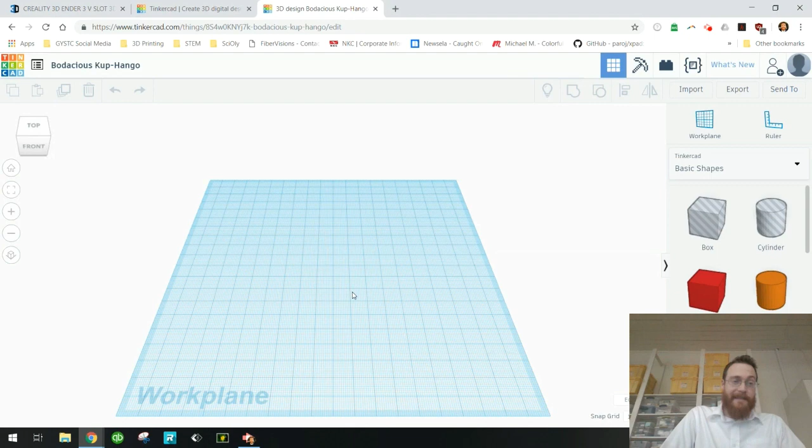Now, CAD, if you're not aware, stands for Computer Aided Design, and that's exactly what we're going to be doing in Tinkercad. Now, the first thing I like to do in any new design on Tinkercad is change this crazy name, Bodacious Kup-Hango. I'm just going to change it to Dodd First Object.

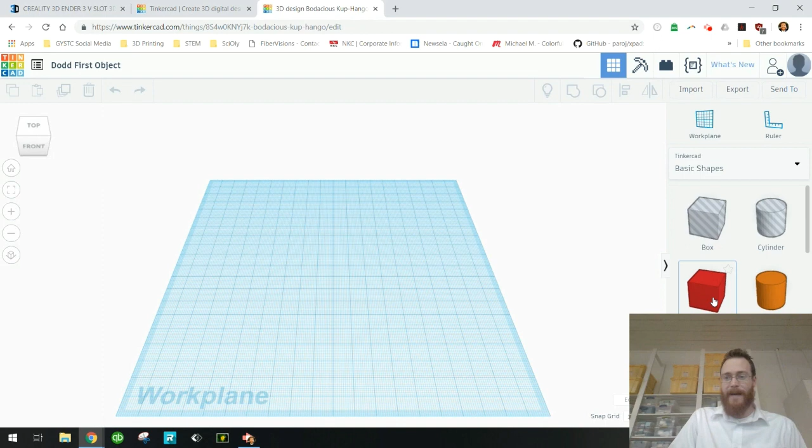All right, again, it's going to be a cube with my initials on it. So I'm going to just grab a box from my right panel here and click and drag it out onto my work plane. Now, I want to resize this box.

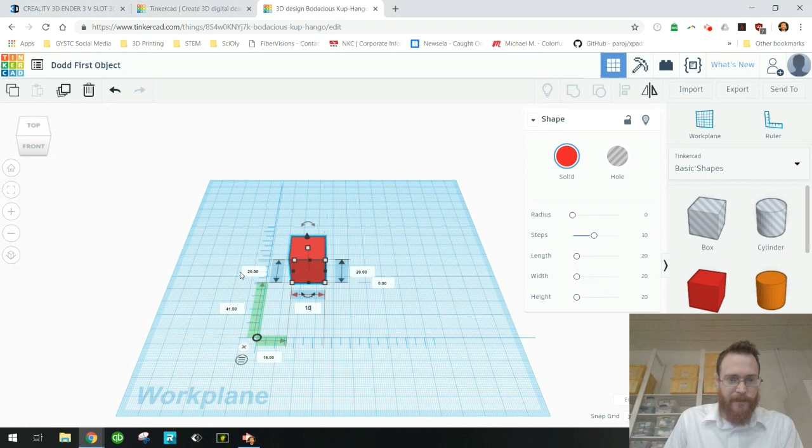My favorite way to resize the box is to click ruler, pull a ruler out, and simply change the size of my box from there. Now, I'm going to change the size of my box to 10 millimeters by 10 millimeters by 10 millimeters.

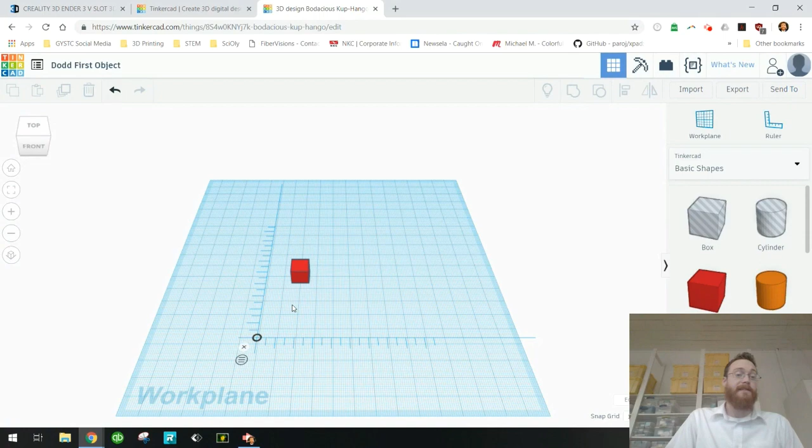So all I did to achieve that was click on the width of my box and type in 10. I clicked on the length of my box and typed in 10, and did the same exact thing for the height of my box. So I've got a really small cube at this point. And that's good because a really small cube is going to be really fast to print, and that's what we want.

So now what I'm going to do is scroll down on the right-hand side of my Tinkercad workspace. I'm not seeing text... there it is, I missed it. So I'm going to grab text and pull it out here onto my work plane.

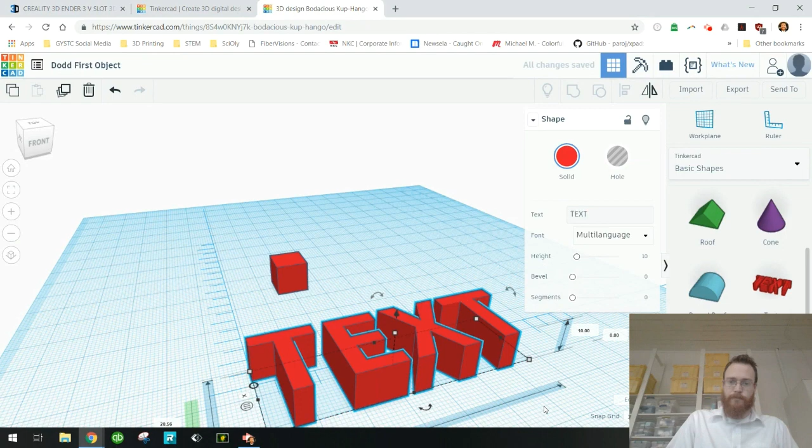And I'm going to make this text my initials. I'm just going to go with my first initial, which is W, because my name is Will. So I'm going to type in a W right here, and make it a capital W.

So what I want to do then is resize this W to be able to fit on my cube. And I know that my cube is only 10 millimeters by 10 millimeters, so I'm going to reduce my letter to under 10 millimeters.

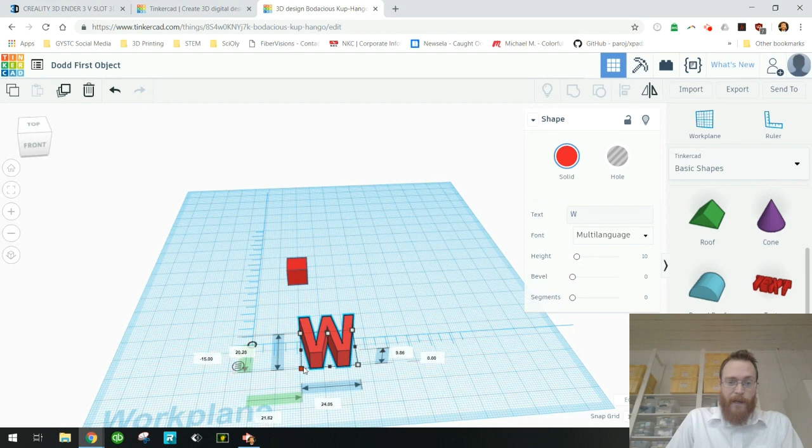The way I'm going to do that, so that I don't make my W short and fat or something like that, is I'm going to hold down the shift button on my keyboard. Then with my mouse, I'm going to left click one of these white squares, and what I can do is make my W smaller but keep it to scale so that it doesn't look funny, because you do run the risk of making it too tall or too short.

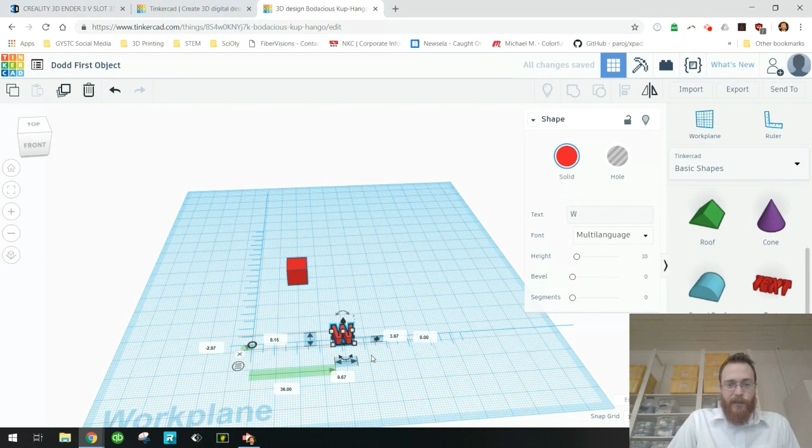But I am, let's see, 9.67 is the width of it. So yeah, we're good, we're underneath 10. So my W is now small enough to fit on my square.

Now, if you're unfamiliar with how I'm actually moving around on the screen here, you might notice that the camera is moving around quite a bit. I do have a video showing you some basic moves in Tinkercad. I would encourage you to review that if you have not, and again, I will link that in the show notes.

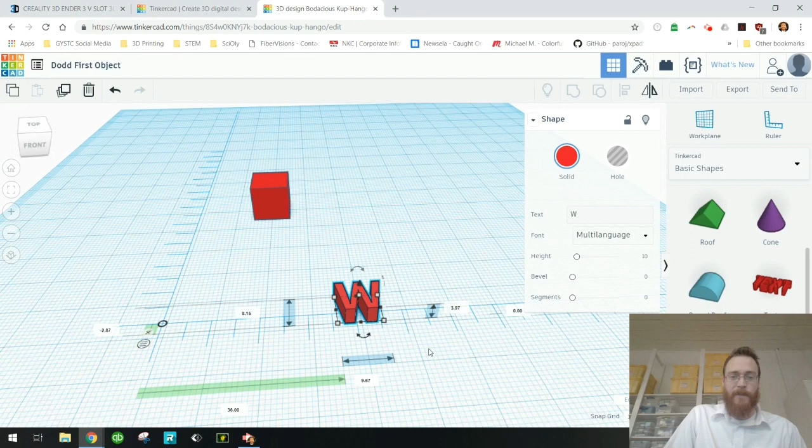The next thing I want to do is adjust my letter so that it's upright and I can just put it straight into my cube. So what I'm going to do is change my camera angle. Let me get rid of that menu. I'm going to click this curved arrow and pull my W up to 90 degrees.

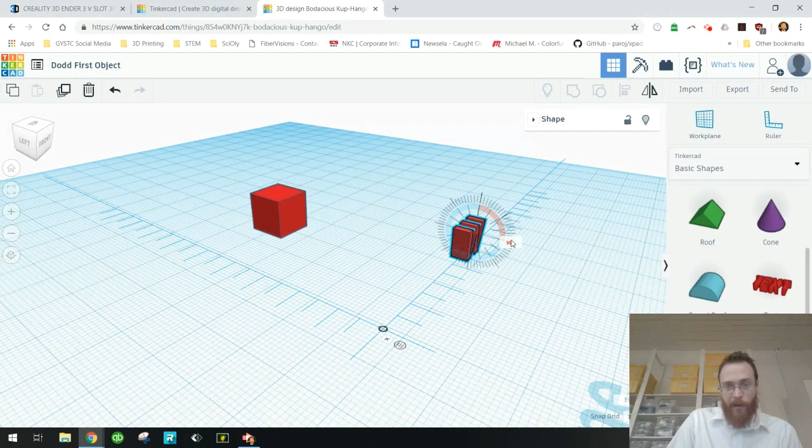There we go, we're at 90 right now. And that way I can just kind of slide that W right into my cube, and it would be no big deal. But before I do anything else, I do want to make sure that my W is aligned with my cube there.

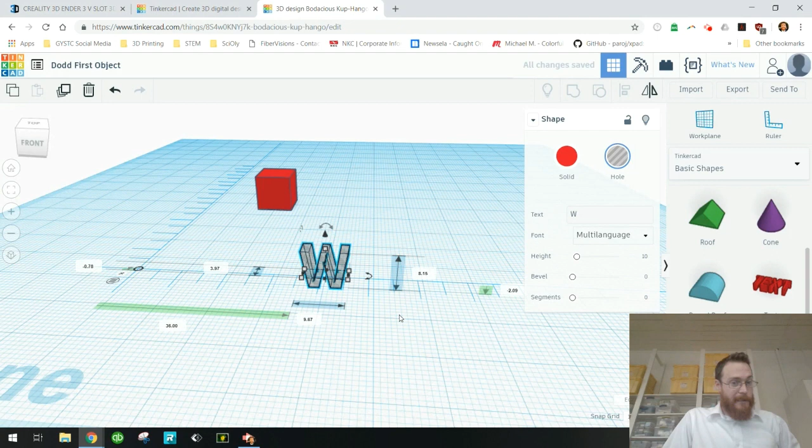But before I align it, I want to turn my W into a hole so it will actually cut a hole in my cube. I'm going back to this menu here, and you can see I've had my W selected. It's a solid. I'm going to turn it into a hole by clicking hole right here, and it should turn gray, which is good because then it's actually going to cut a hole into my cube.

Now, to get these lined up correctly, I'm going to left click off of my work plane. My graphics card is doing some weird stuff, but I'm selecting both of my objects. What I want to do now that both objects are selected, my cube and my W, is go up to the top bar and click Align.

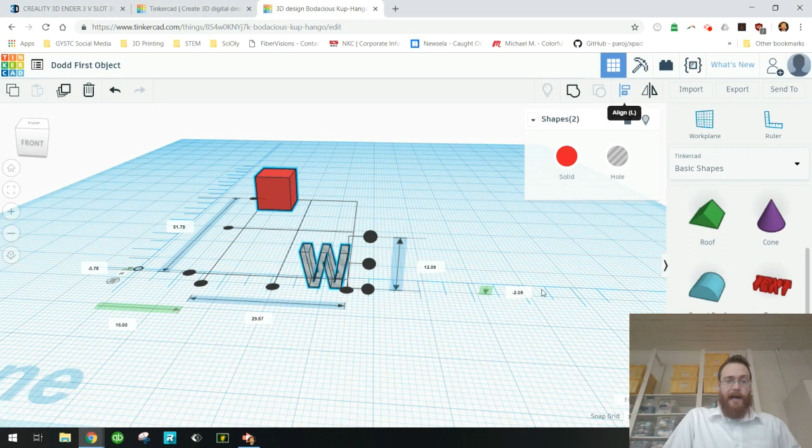When I click Align, I'm going to see a bunch of dots appear. These are dots I can use to actually align the shapes that I have. I want my W and cube to be aligned on their Z axis, which is the up and down axis. So I'm going to click the center align button right there, the middle dot. So they're aligned on their Z axis now.

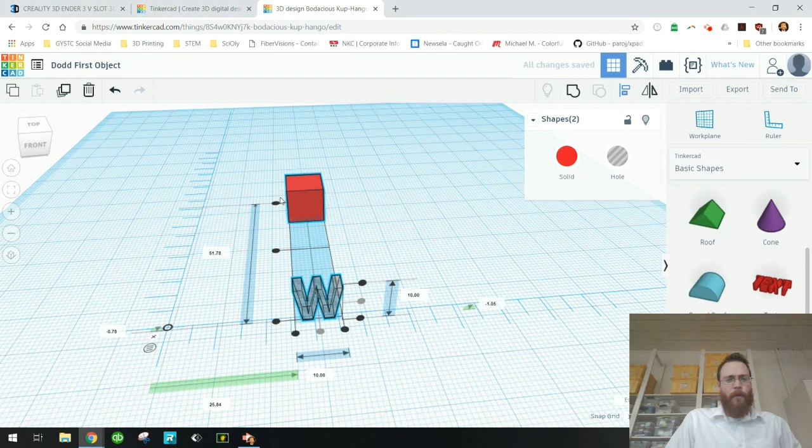I also want them to be aligned along their X axis, which would be left and right. So I'm going to click the center dot there, and you can see that lines them right up. And then for my Y axis, I want to click this dot because that's going to cause my W to be right in the front of my cube. I'm going to click that, and you can see my W is right there, centered in the middle.

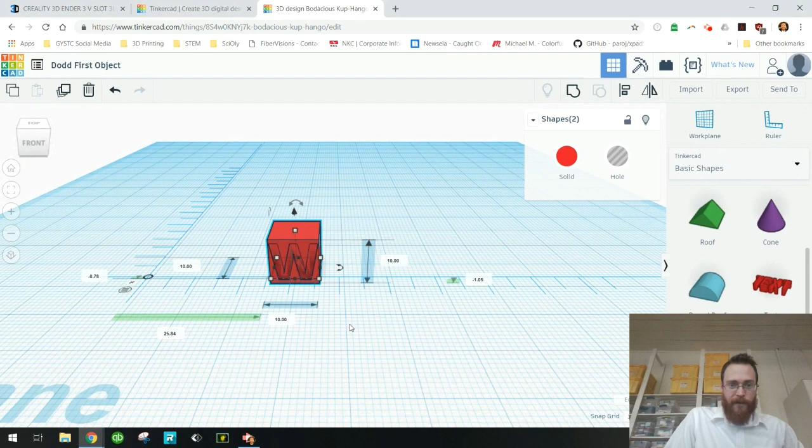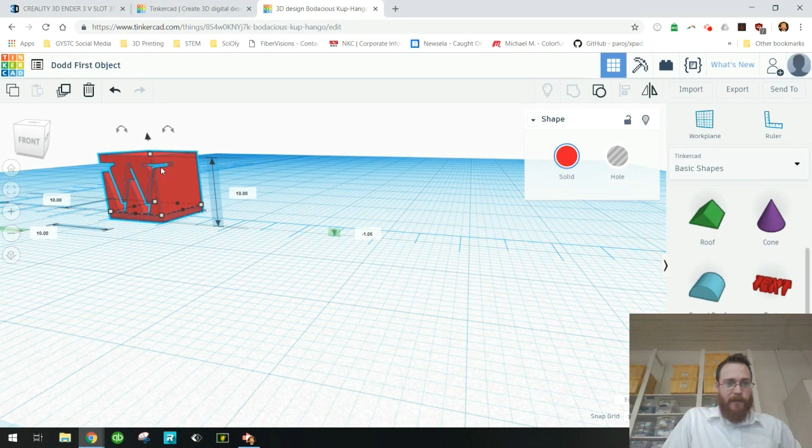So what I can do now is click off here, select both my objects again, and click the group tool. That's going to cut a hole in my cube. Now you'll see right here I got some funny things going on with my cube. See how the W cuts through the side of my cube? I don't really want that to happen.

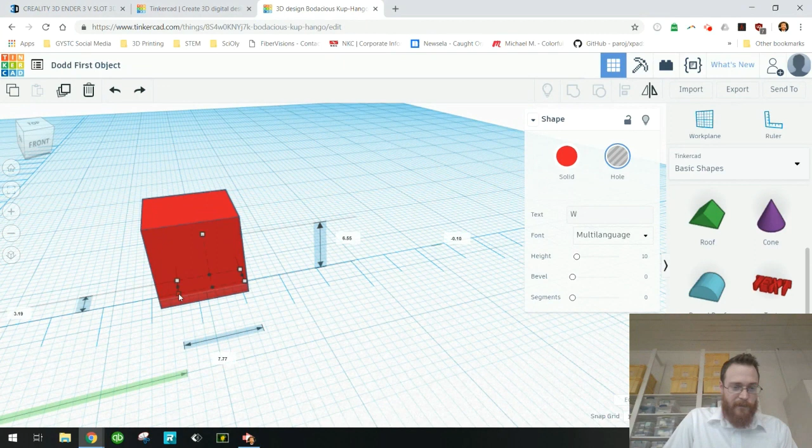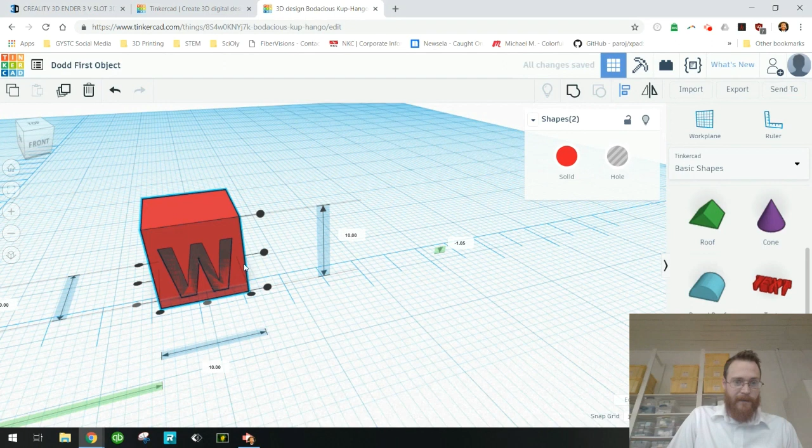So I can click this undo button, and that's going to pull back to my last edit. I want to grab my W, click on it, and resize it. I'm going to click Shift and click on one of these little white squares, and I've resized my W to be smaller. Now I'm going to Shift click my box - pressing Shift and clicking allows me to select two objects at once - and I'm going to realign those objects. I'm going to click this middle dot again, this front dot again, and the middle on the Z axis again.

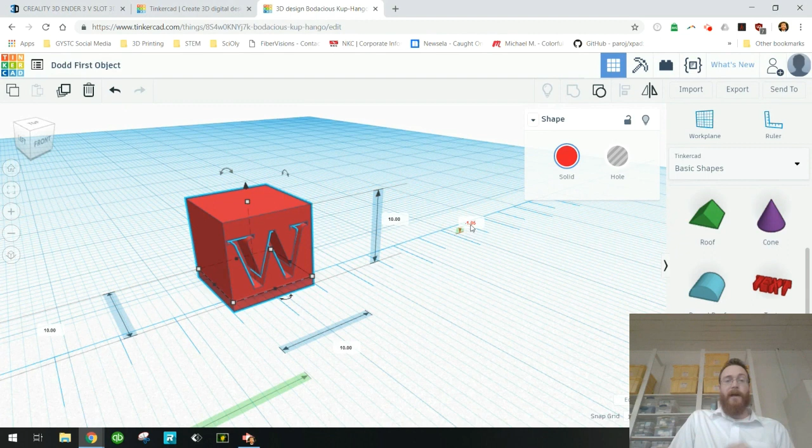All right, so I like how that looks. Let me group them and see if I get some weird holes cut. And we're looking good, we're all right. But you'll notice my box is down underneath my work plane - I don't know if you noticed that. If I look at my ruler, it's -1.05 millimeters underneath my work plane. I want that to be 0, so I'm going to click on that and turn it into a 0.

And you can see now my cube's looking pretty good. I think I'm ready to roll.

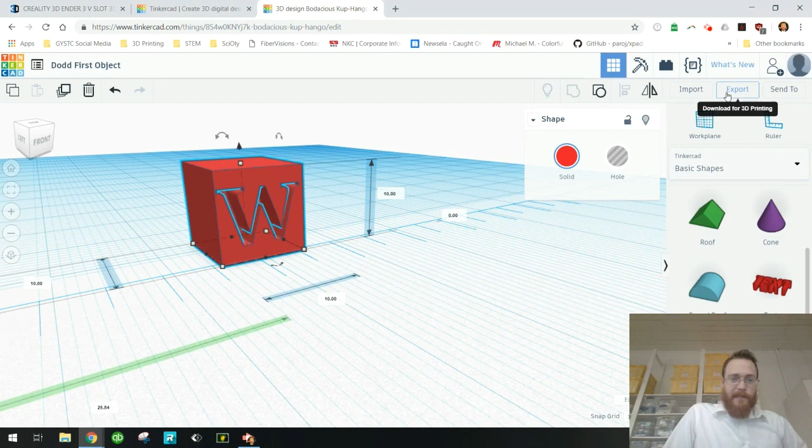So what I need to do at this point is click export, because I'm going to download this design as an STL file. I'm going to click export, and I want everything in the design to download, so I'm clicking everything in the design, and I'm going to select STL, standard tessellation language - that's the type of file it's going to put out to me. So I'm going to click STL, and I should see - there it is - Dodd First Object STL.

That's going to show up in my downloads folder, which is going to take us into our next video. In the next video, I'm going to show you how to take that STL file and upload it into something called AstroPrint, slice it for our printer, and then actually put it on the printer and print it out. All right, so I will see you in the second video. See you then.